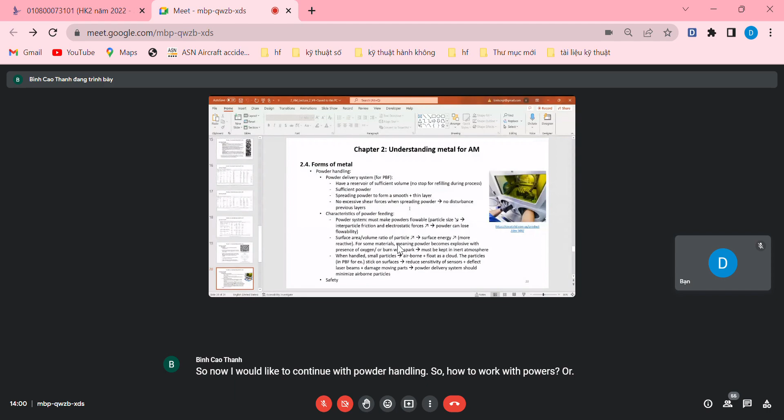So now I would like to continue with powder handling, so how to work with powders, or this may be related to the system inside the AM machines.

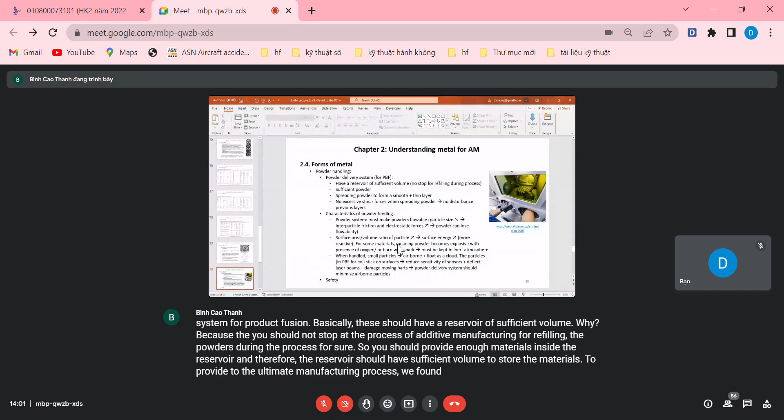Okay, the powder delivery system for powder bed fusion. Basically, this should have a reservoir of sufficient volume. Why? Because you should not stop the additive manufacturing process for refilling powders during the process. So you should provide enough materials inside the reservoir to store sufficient powders to supply the process without interruption.

The system should spread the powder to form a smooth and thin layer. Remember that for certain materials, for example stainless steel 316L, the minimum layer thickness can be 20 microns, a relatively thin layer, so you need a precise powder delivery system to spread the powders to form smooth and thin layers.

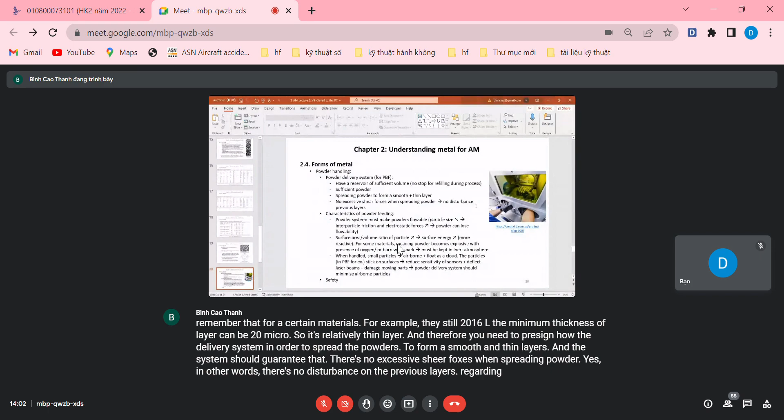And the system should guarantee there are no excessive shear forces when spreading powder. In other words, there's no disturbance on the previous layers. Regarding the powder feeding characteristics, yeah.

So the powder system must ensure the flowability of powders. This can be done by reducing the particle size. Basically, you should reduce the size of the powders.

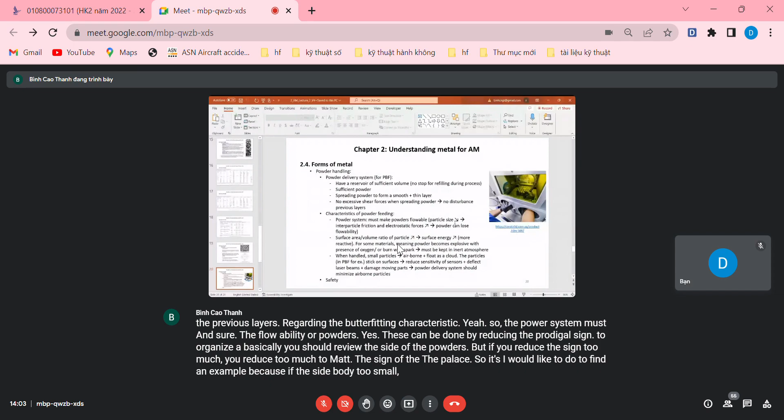But if you reduce the size too much of the powders, if the size of the powder is too small, then they tend to stick to each other, so it's easier to have agglomeration. So again, finding a trade-off or balance is also important to guarantee the flowability of the powders.

This means that if you reduce the size too much, you may have an increase in friction and electrostatic force, and in that case you lose the flowability, so this should be carefully performed.

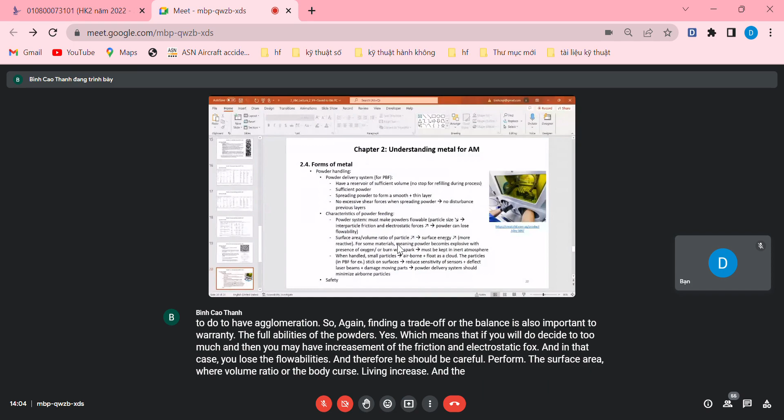The surface area per volume ratio of the particles, if it increases, the surface energy is increased and the powder becomes more reactive. This is especially important for magnesium or aluminum powders.

So if you reduce the size of the powders, the surface area within a specific volume will significantly increase, and therefore the probability that oxidation reactions occur can be increased. You should pay more attention, especially in the case of aluminum powders, because it's easy to react with oxygen or be ignited by electric discharge.

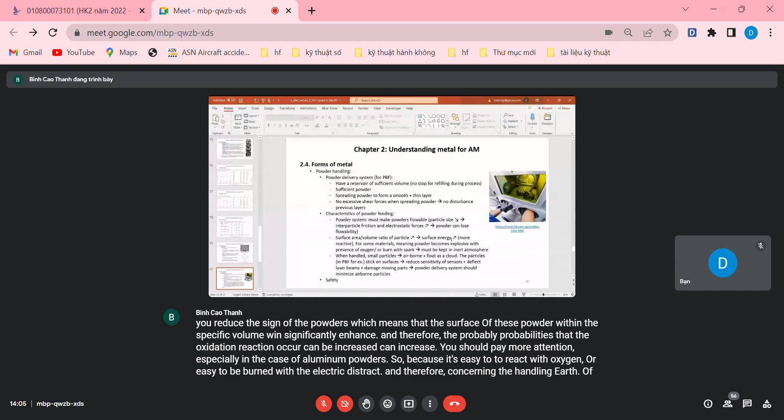Concerning the handling of aluminum powders, the powder should be kept inside an inert atmosphere to prevent oxidation reactions or reaction with moisture, which can cause exothermal reactions, and the heat will have a negative effect on those who handle powdered metals, like in the case of aluminum powders.

When handling small particles, they can float as a cloud, and the particles, when they float as a cloud, can stick on the surface, for example the surface of the sensor.

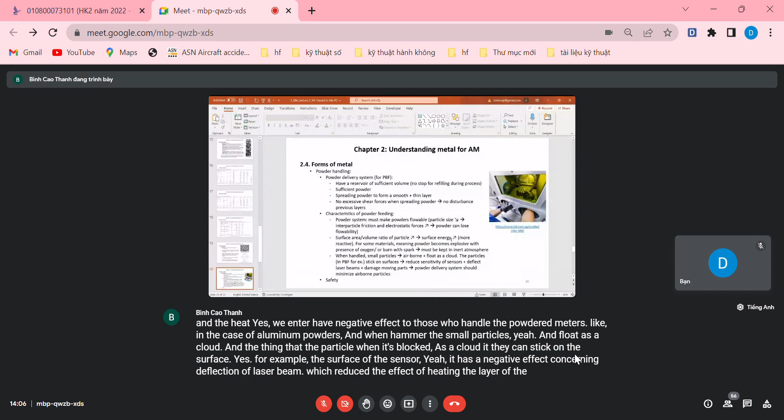This has a negative effect concerning deflection of the laser beam, which reduces the heating effect on the layer of materials, and therefore negatively influences the welding process that occurs in additive manufacturing, so you should pay attention to this.

It can also damage moving parts. This is just some information to let you know that if you reduce the size of the particles, these are the effects and considerations you need for the powder feeding system.

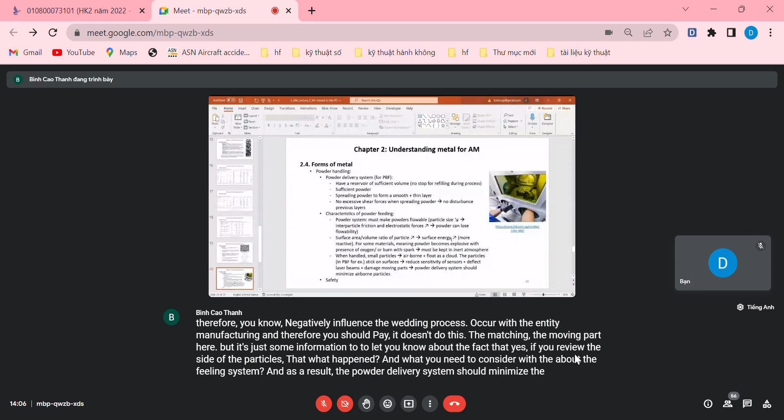As a result, the powder delivery system should minimize airborne particles, or small particles that flow as a cloud, because when this deflects the laser beam, the laser beam cannot irradiate onto the area that is supposed to provide heat to locally melt the powders.

In that case, you have a lack of fusion defect, and therefore the porosity of the part after the sintering process will be increased, which should be avoided for sure.

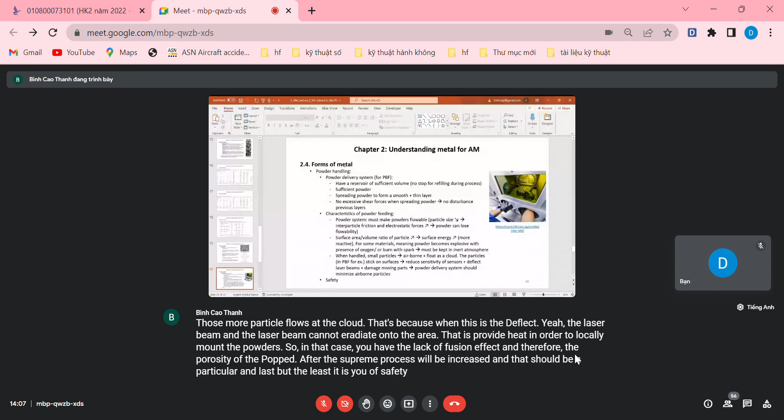And last but not least is the issue of safety when handling powders. If you breathe the powder, it can go into your lungs and stick there for a long time, which is quite detrimental to human health.

Concerning the powder production process, as mentioned in previous slides, we can use the gas atomization process or water atomization process. For the typical gas atomization process, firstly we have the input metal alloys, and then we use induction melt or furnace melt to create the molten pool.

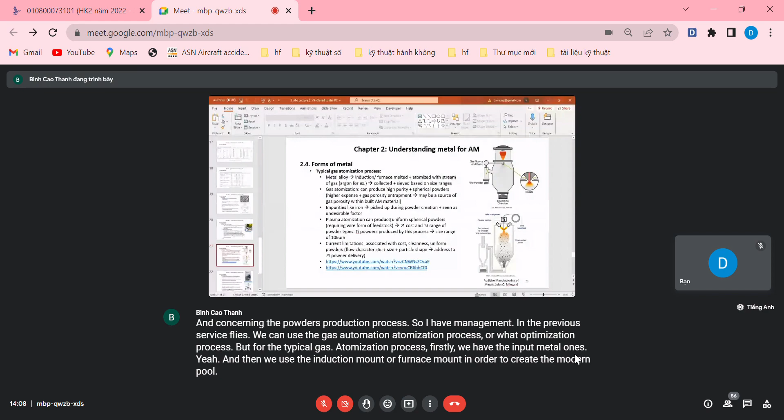So the initial material needs to be melted inside an oven, and then the atomization process with a stream of gas, like inert gas such as argon, is used to support the process of atomization.

Below, you can collect the powders, and then use the sieving process to eliminate large particles or agglomerations, distinguishing different size ranges of the powders.

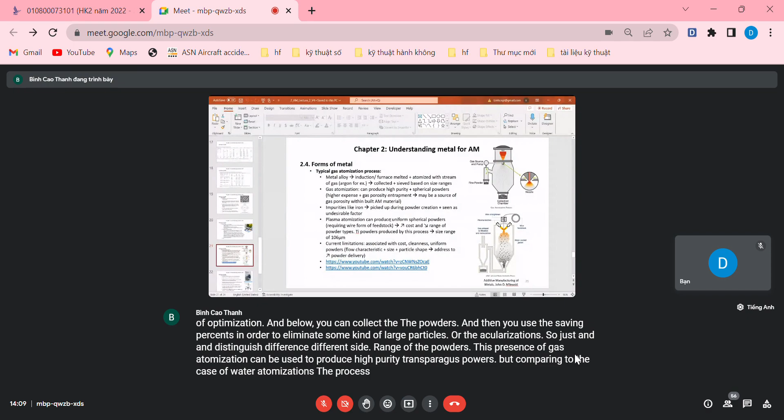This gas atomization process can be used to produce high purity and spherical powders. But compared to water atomization, the process is more expensive and may have gas porosity, because the gas can be entrapped inside the powders, causing porosity.

If the powder has porosity and you use additive manufacturing to fabricate the part, the pore remains inside the powders. When the powder is joined with another powder by a wetting process but not completely melted, the porosity remains inside the additive manufactured part, so you should pay attention to this issue.

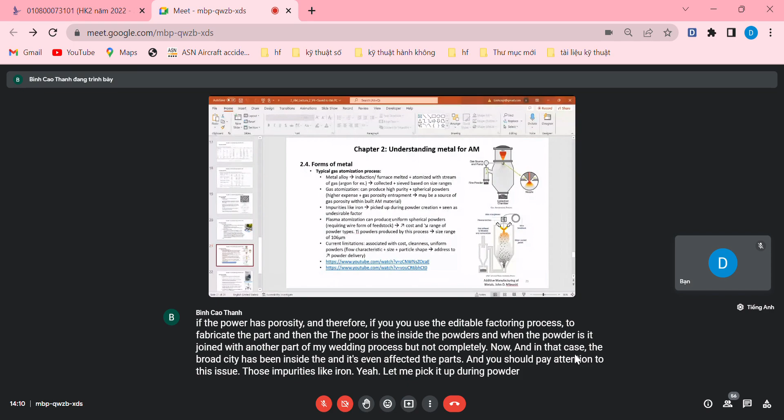Impurities like iron can be picked up during powder creation, and if we consider titanium material, iron can be considered an undesirable factor.

Plasma atomization can produce uniform and spherical powders. But since the feedstock material for plasma atomization requires the wire form of the material, you need an additional processing step, which enhances the cost.

Titanium powders are an example. This can be produced by this process, and we can achieve an output material size range of 106 microns.

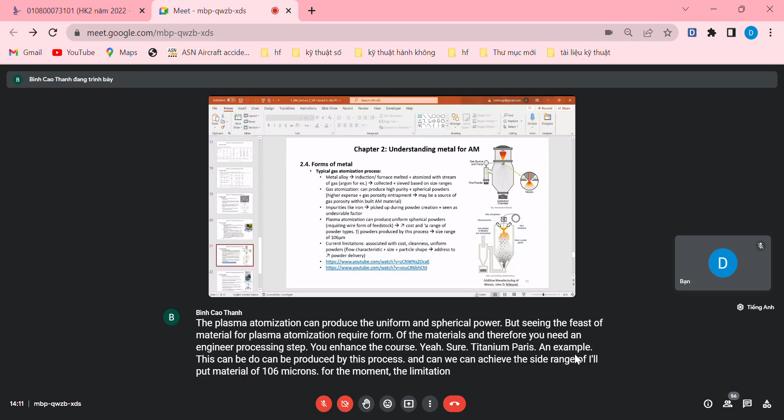For the moment, the limitations associated with the gas atomization process are cost, cleanliness, and whether or not we have uniform powders, because we may have irregular form powders. Uniform powder is quite important because it affects the flow characteristics.

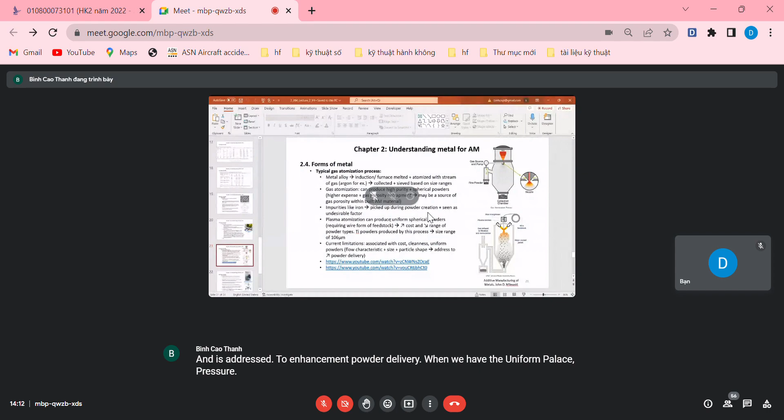The flow abilities are addressed in uniform powders. Think about the fact that if you have agglomeration inside the nozzle, it can block the nozzle, so the process cannot be continued anymore.

Wire and electrode: metal wire can be in many forms, and this is still under development for additive manufacturing.

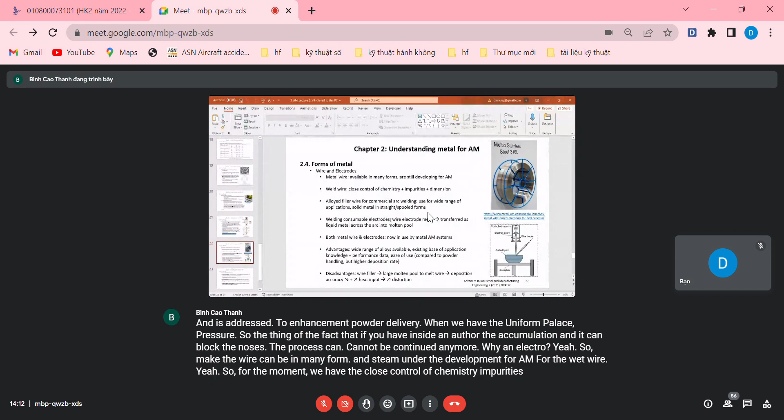For the weld wire, we currently have close control of chemistry, impurities, and dimensions, because we also developed the weld wire for the traditional welding process - not only for welding. Alloy filler wire for commercial arc welding is used for a wide range of applications, so we know pretty well about this.

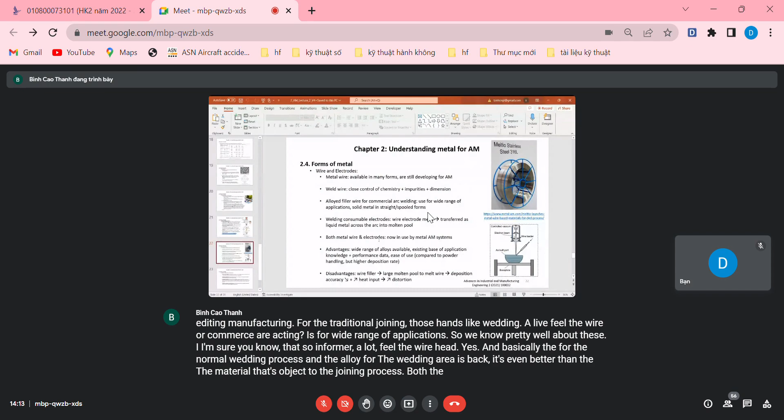I'm sure you know that basically the welding area is even better than the material that's subject to the joining process. Both the metal wire and electrodes are now in use by the metal additive manufacturing system, and everything has two side effects, so wire and electrodes have both advantages and disadvantages.

Advantages are, for example, a wide range of alloys available, which means it's cheaper to buy if they are available, existing based on the application.

Disadvantages concern probably the accuracy of the additive manufacturing process, because we have a large molten pool to melt the wire, so it affects negatively the deposition accuracy of the additive manufacturing process.

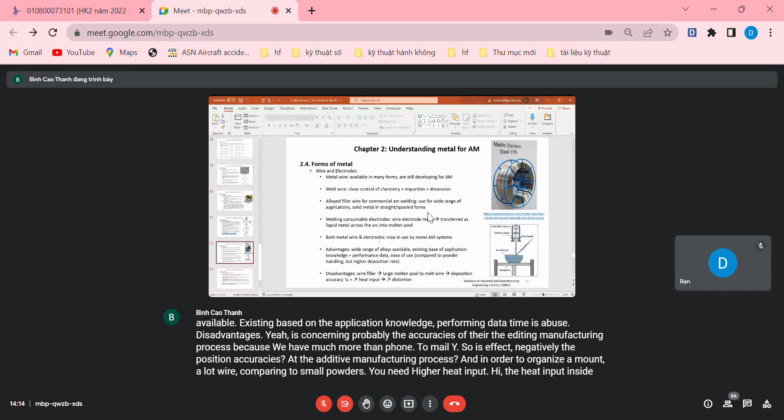In order to melt a large wire compared to small powders, you need a higher heat input. A higher heat input inside the building chamber means you may have the possibility of thermal gradients when additively fabricating the part.

In other words, you may have stress concentration, the residual stress caused by thermal factors, and if it's released, you may have distortions. Using the wire filler, you may have the possibility of part distortion after the additive manufacturing process.

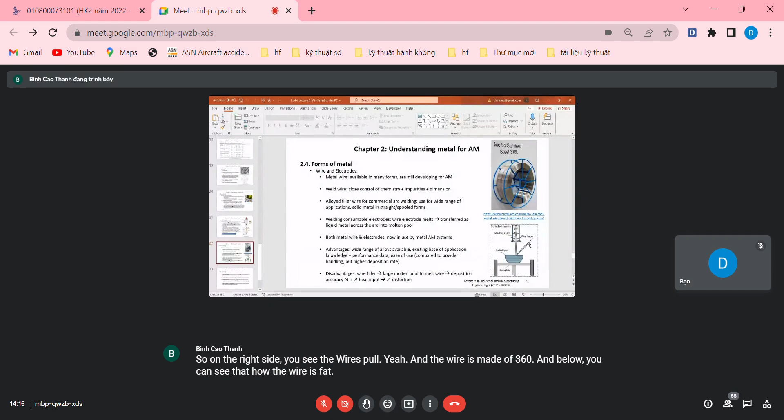On the right side, you see the wire spool, and the wire is made of 316L stainless steel. Below, you can see how the wire is fed to the additive manufacturing system using an electron beam as the heat source in order to build up the part layer by layer.

Almost the last line of chapter 2, we can talk about other types of materials. For example, composite, intermetallic, and metallic glass.

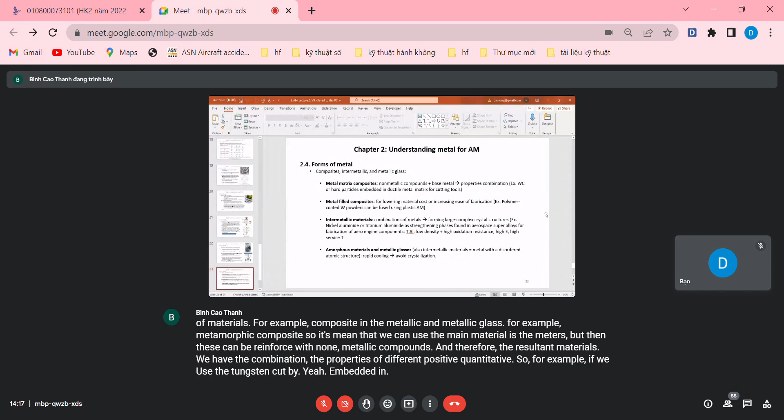For example, metal-matrix composite means the main material is metal, but it can be reinforced with non-metallic compounds, so the resulting material combines properties of different constituents. For example, tungsten carbide embedded in a ductile metal matrix for cutting tools. The cutting tool will have the properties of tungsten carbide and the properties of the metal matrix combined.

The aim of using metal filled composites is lowering material cost and improving the ease of fabrication, like in the case of polymer-coated tungsten powders.

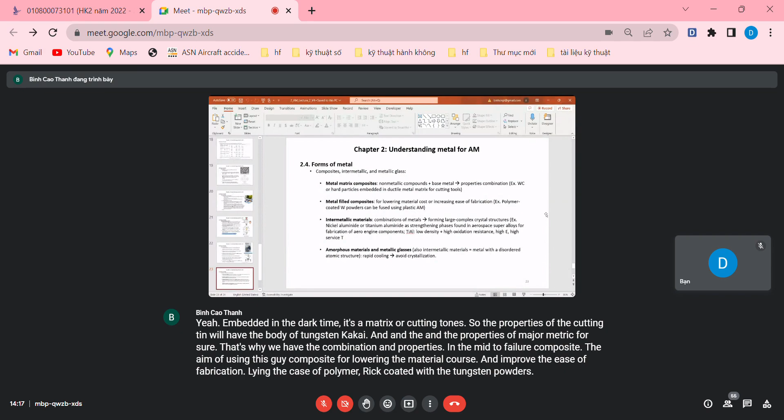Intermetallic materials are combinations of different metals forming large complex crystal structures. For example, titanium aluminide, which can be introduced in chapter 3 on aerospace materials. We will not focus so much on these materials, but it's among the type of titanium alloys, as the strengthening phase found in aerospace superalloys for fabrication of aerospace engine components.

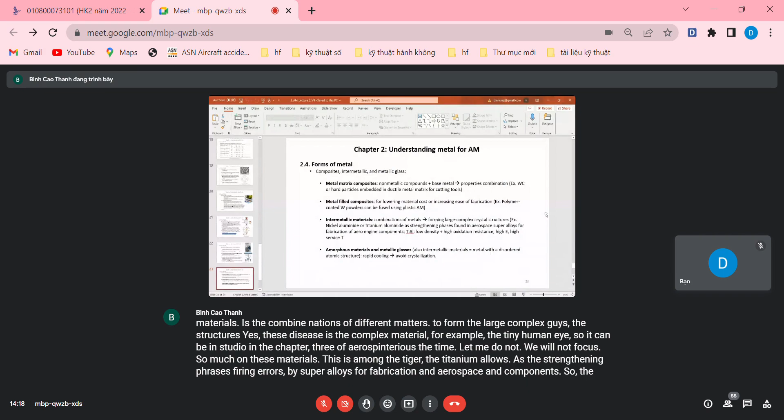The properties of titanium alloy are low density, meaning it's a light material. High oxidation resistance means its affinity with oxygen is low, so it's hard to react with oxygen. It has high strength and higher service temperatures, but compared to nickel-based superalloys, titanium alloys can withstand lower maximum temperatures.

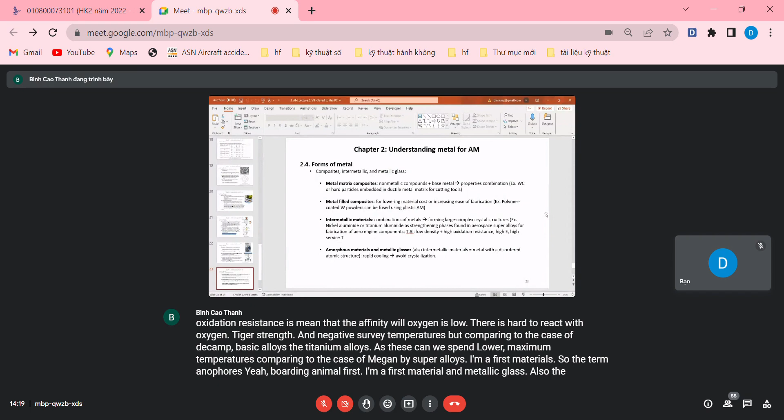Amorphous materials - the term amorphous, vô định hình, amorphous material and metallic glass. Basically you can understand this material as matter with disordered atomic structures.

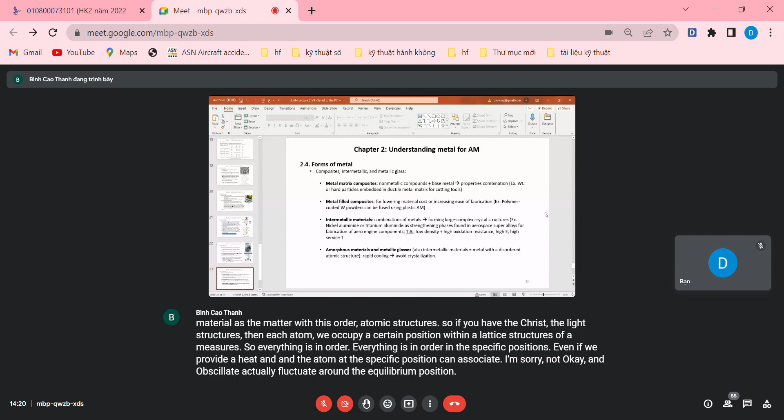If you have crystallized structures, each atom will occupy a certain position within the lattice structure of the matter, so everything is in order, in specific positions. Even if we provide heat, the atom at a specific position can oscillate or fluctuate around the equilibrium position, but it's still in a fixed position, let's say.

But for amorphous materials, atoms do not have an ordered position within the atomic structure. This can be formed by performing rapid cooling from the molten state, aiming to avoid crystallization.

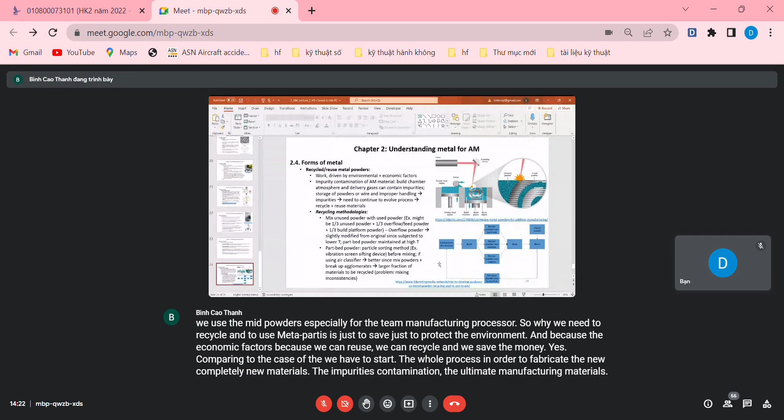The impurities and contamination of additive manufacturing materials can occur inside the build chambers. This is because we have the shielding gas acting like a shell to prevent the materials from reacting with gases like oxygen, nitrogen, and so on. However, the gas can contain impurities.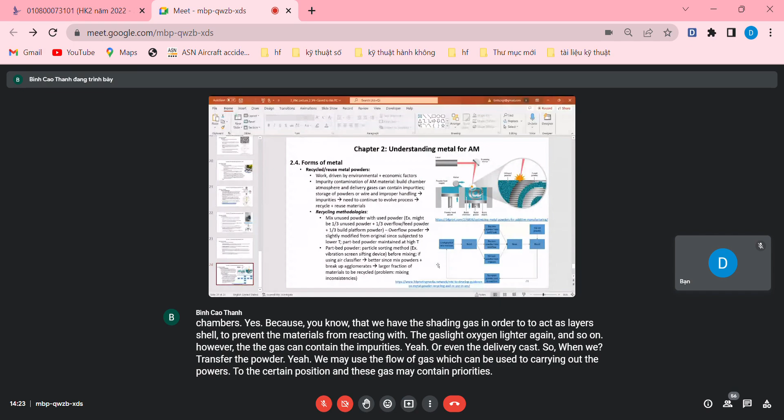Or even the delivery gas - when we transfer the powder, we may use a flow of gas to carry the powders to a certain position, and this gas may contain impurities, leading to impurity contamination of AM materials. So we need to store the powders in an appropriate way, with proper handling, in order to prevent this impurity. In other words, improper handling of the powders can create impurities, and therefore we need to evolve the process of handling.

Or if we have the impurities, or if we want to save the environment, and then we need to recycle and reuse the materials.

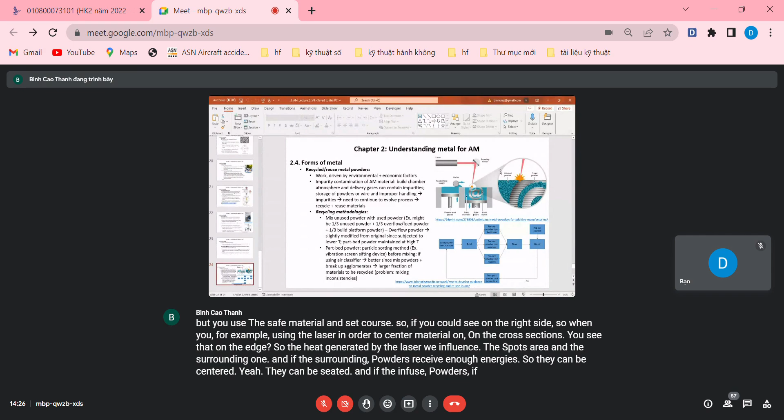So if you could see on the right side, for example using the laser in order to sinter material on the cross section, you see that on the edge, the heat generated by the laser will influence the spot area and the surrounding one. And if the surrounding powders receive enough energy, they can be sintered. If people want to use the unfused powder for the reusing process, then those sintered powders need to be eliminated by sieving techniques, for example.

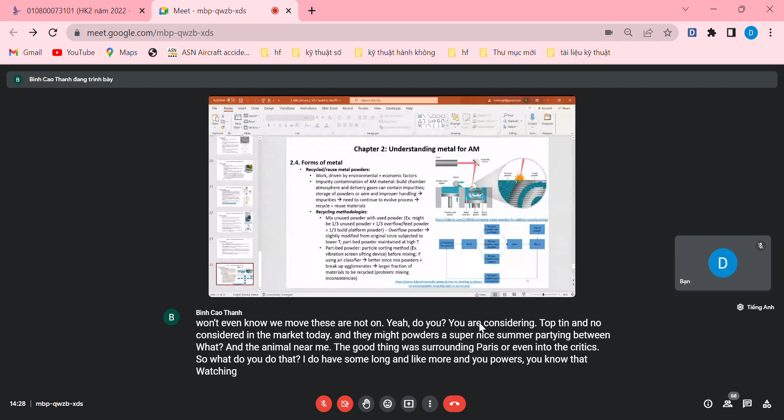As it's easier, people can mix unused powder with used powders. So one suggestion is to combine one third unused powder, one third overflow of feed powders, together with one third build platform powders.

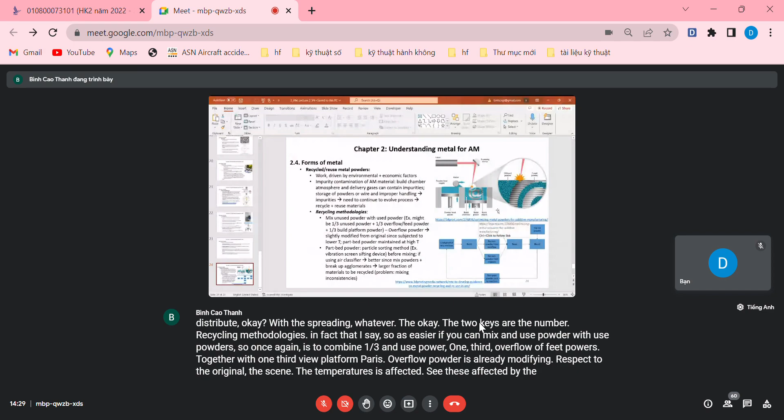Overflow powder is already modified with respect to the original, since the temperatures are affected during the sintering or melting process.

The part bed powders use the particle sorting method, just sorting by sieving before mixing, in order to eliminate some type of agglomerations or sintered powders, or to be used for the recycling process. Nothing special.

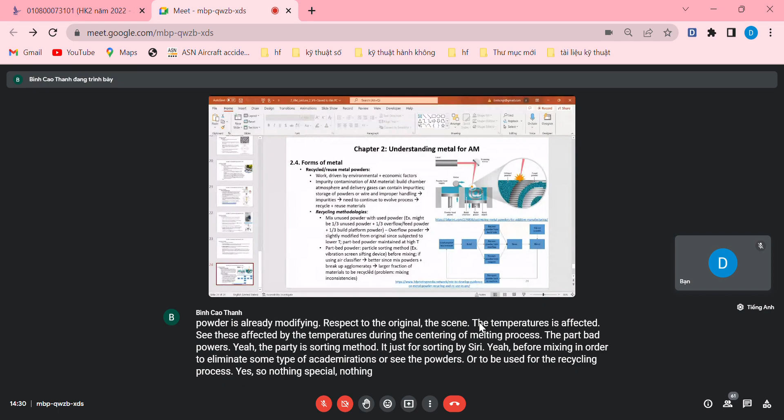So from the loading of powders to the machines, the powders can be used here, fed for the building process, and after the build...

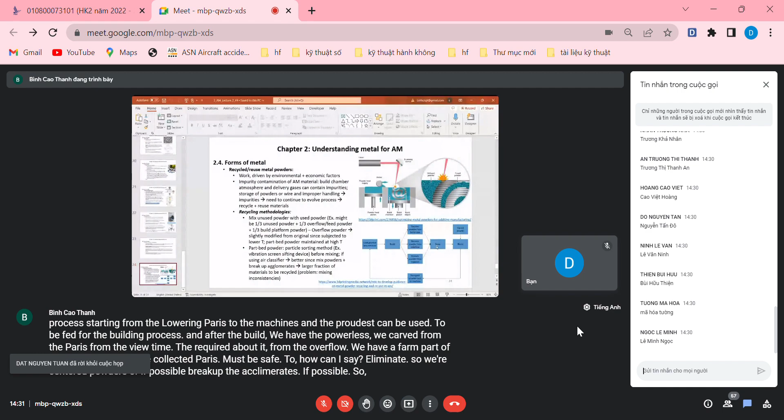We have the powders recovered from the build tank, the recovered powder from the overflow, and recovered powder from the hopper. So all the collected powders must be sifted to eliminate the sintered powders, or if possible, break up the agglomerates. So this means that after the sieving, we have the powder which is ready to be reused.

Afterward, you need to mix this powder with new powders, about one third amount of new powder, and then we transport it back to the machines and load it in, ready for the next build.

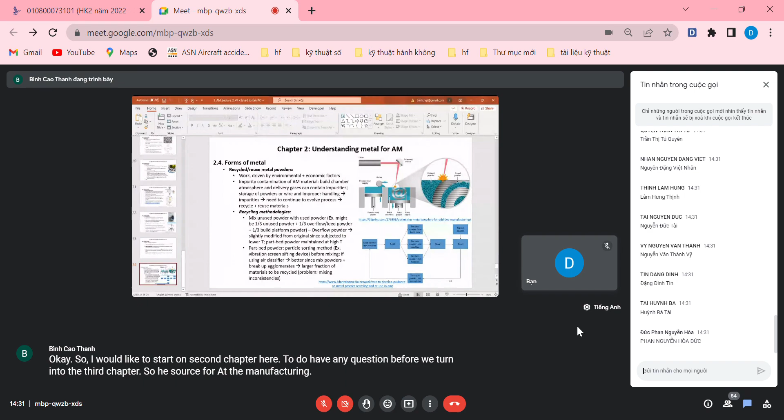Okay, so I would like to stop the second chapter here. Do you have any question before we turn to the third chapter? Heat source for additive manufacturing. I'll leave it here for a minute. I know you're spending time writing your name. Okay, then no question. Okay, so I will start with the third chapter.

No, no, no, this is the aerospace material. Okay, additive manufacturing, yeah, that third one. Okay.

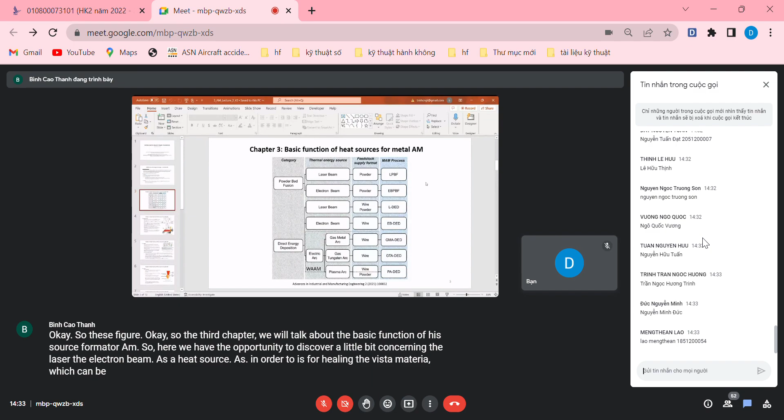So this figure, okay, the third chapter, we will talk about the basic function of heat sources for AM. So here we have the opportunity to discover a little bit concerning the laser and the electron beam as a heat source, used for heating the feedstock material, which can be either powders or wire. And of course, the heat source can also be others, like wire arc additive manufacturing, wire arcs.

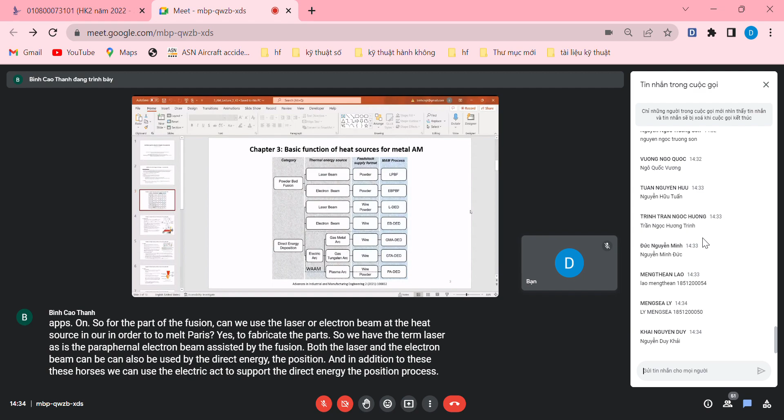So for powder bed fusion, can we use the laser or electron beam as the heat source in order to melt powders? Yes, to fabricate the parts. So we have laser powder bed fusion and electron beam assisted powder bed fusion. Both the laser and the electron beam can also be used by direct energy deposition. In addition to these heat sources, we can use electric arcs to support the direct energy deposition process. Almost all direct energy deposition processes can use wire as feedstock material, and some can employ powders as the feedstock material.

Now I would like to talk a little bit about the molten pool. So the heat source intends to heat up the material to create a molten pool. The laser, for example, is focused on a small area, providing enough heat to locally melt the material on the surface, and we have the melt pool here.

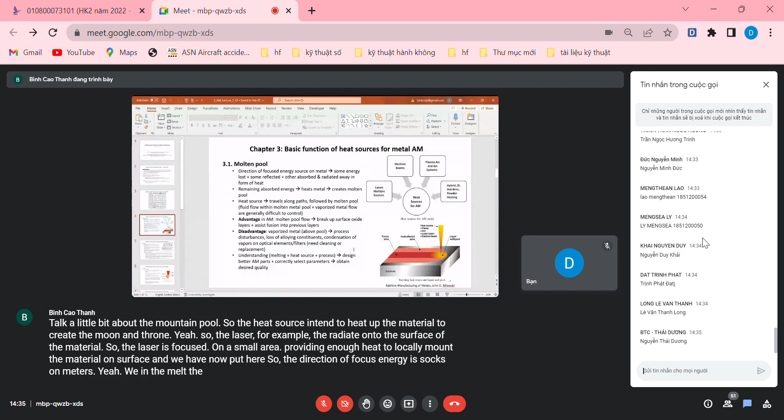So the direction of focused energy strikes on the material and will melt the material if the energy provided is enough. Because when traveling from the mirror, the source, to the surface of the part, some energy is lost.

Some energy, when reaching the surface, will be reflected, so it will not be absorbed onto the material to heat it up. Others can be absorbed, but are immediately radiated away in the form of heat. So some energy is lost, either before reaching the surface, or reflected, or afterward radiated away as heat. The remaining absorbed energy will play a role in heating the parts or the material to create the molten pool at these positions.

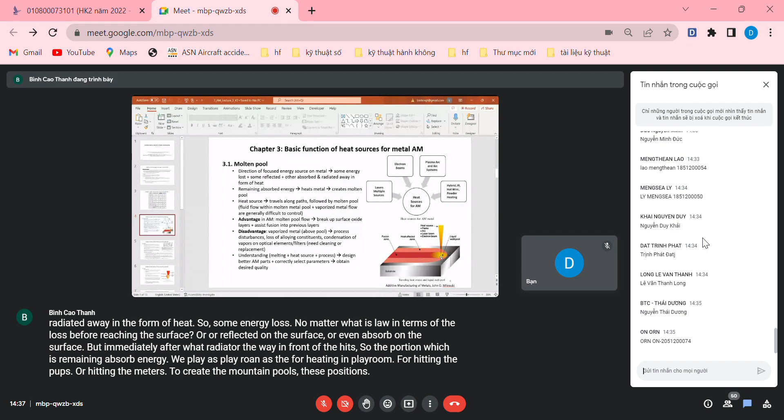You know that the heat source or the laser beam travels along the path following the scanning vector. And when it travels, it's followed by the molten pool. So when it moves to the next position, the molten pool will be created, and it's followed by the molten pool when the heat source travels along the path.

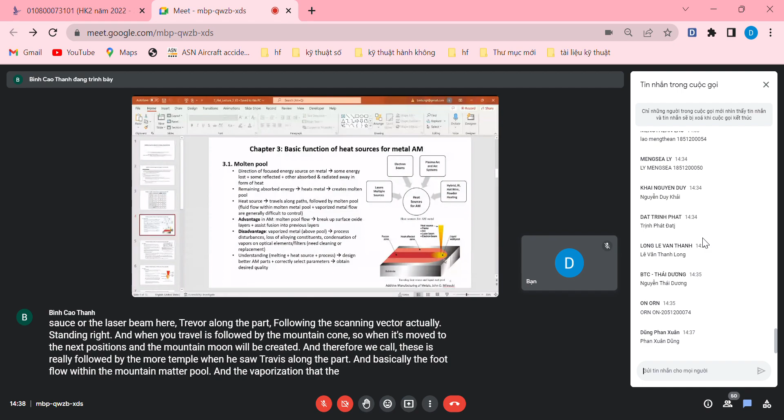Basically, the fluid flow within the molten metal pool and the vaporization of the flow are generally difficult to control because it occurs at high temperatures. And the scanning affects the control of the fluid flow within the molten metal pool and the vaporized metal flow.

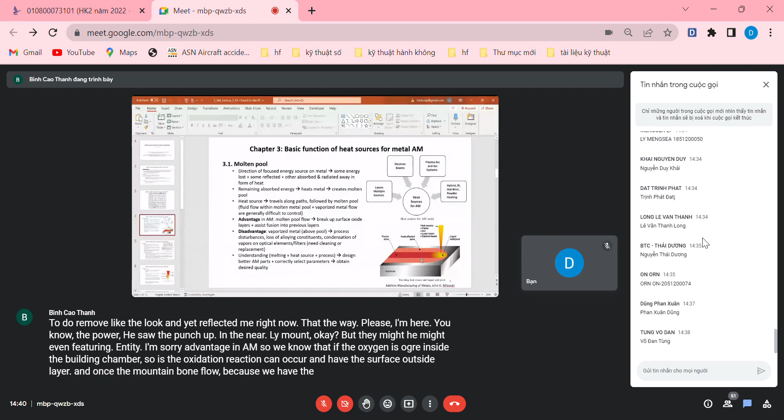Advantage in AM. We know that if oxygen occurs inside the building chamber, the oxidation reaction can occur and we have a surface oxide layer. Once the molten pool flows, because we have the traveling of the heat source along the path, the molten pool flow can break up the surface oxide layer and support the fusion and joining to the previous layers.

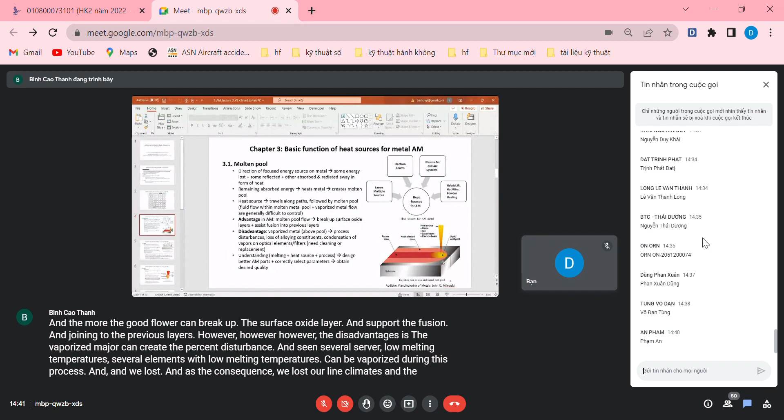However, the disadvantage is the vaporized metal can create process disturbance. Since several elements with low melting temperatures can be vaporized during this process, we lose alloying elements, and the composition of the material is changed, modified, leading to modification of properties afterwards. So it is unexpected.

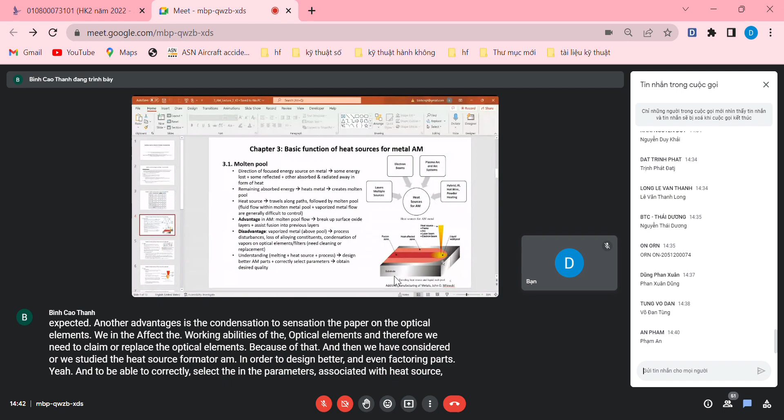Another disadvantage is condensation of vapor on the optical elements, which will affect the working abilities of the optical elements, and therefore we need to clean or replace the optical elements because of that. Then we consider or study the heat source for metal AM in order to design better additive manufacturing parts, to be associated with the heat source to create high quality parts.

Laser. We know that laser is light. This is a high energy density beam of photons. Light is photon. It's a wave, but it's also a photon.

Laser can be transmitted and focused to a small spot of energy. When the energy is focused to a small area, it can heat up the material, especially metal, to the melting temperature, and we create the molten pool.

The laser equipment: basically we have beam power, and the power can be up to thousands of watts. The focus spot is a fraction of millimeters.

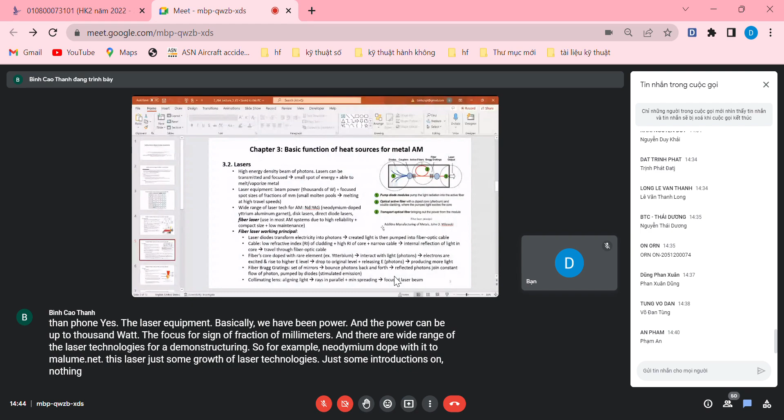There are a wide range of laser technologies for additive manufacturing, for example neodymium doped with yttrium aluminum garnet. These are just some groups of laser technologies, just an introduction, nothing more than that, because we focus on investigation of lasers.

That's enough. Direct diode laser, fiber laser, and the fiber lasers are used in most AM systems, since it has high reliability, compact size, and low maintenance cost. On the right side of the slide, showing you the graphic description of the fiber laser principle.

So basically, the laser diode transforms the electricity into photons. The photon, or light, is then pumped into the fiber optic cable. The cable has the core and the external part.

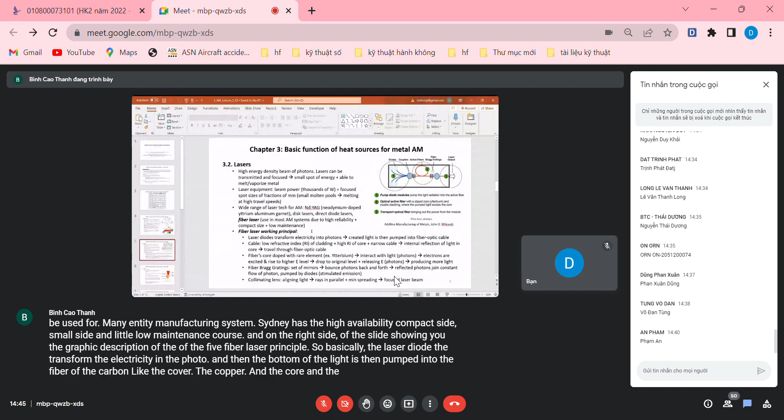The core has high refractive index. The cladding, or cover, the outside part, has low refractive index. So when the light travels through the cable, we have internal reflection of the light just inside the core, and it travels through the fiber optic cable.

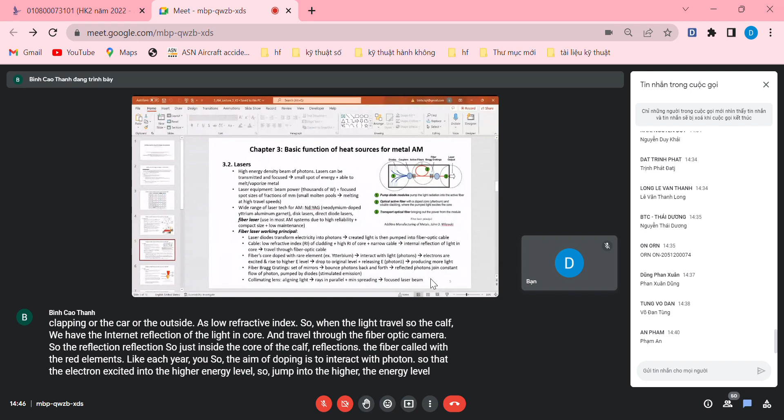The fiber core is doped with rare earth elements like ytterbium. The aim of doping is to interact with photons so that the electrons are excited into a higher energy level, like you studied in 12th grade physics. When at the high energy level and it jumps down to the lower energy level, it releases the energy in the form of photons, which produce more light. That's why we dope the core with rare earth elements, to produce more light.

This here, and then it's passed through the fiber Bragg grating. It's actually a set of mirrors that bounce photons back and forth to reflect photons, and it's pumped by diodes.

And last is the collimating lens, which aligns the light to minimize spreading and create a focused laser beam. So as output we have the focused laser beam, providing enough heat to the surface area which needs to melt, to create the melt pool. A high energy beam.

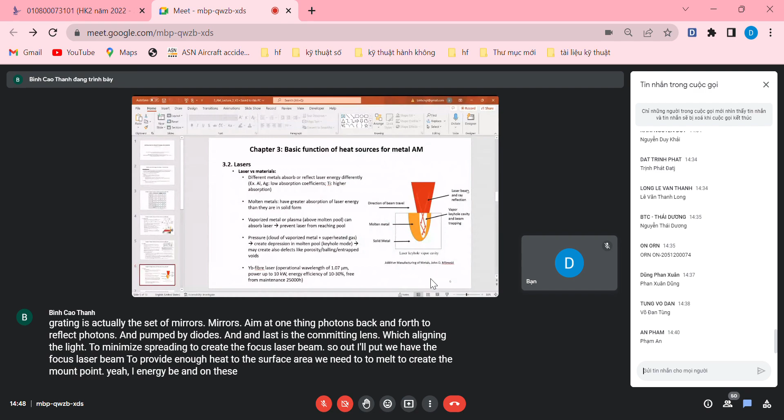On this line we consider the interaction between the laser and the materials. Different materials will behave differently. In particular, metals absorb laser energy differently. For example, aluminum or silver has a low absorption coefficient, so it's easier to be reflected. On the contrary, titanium has higher absorption of laser energy.

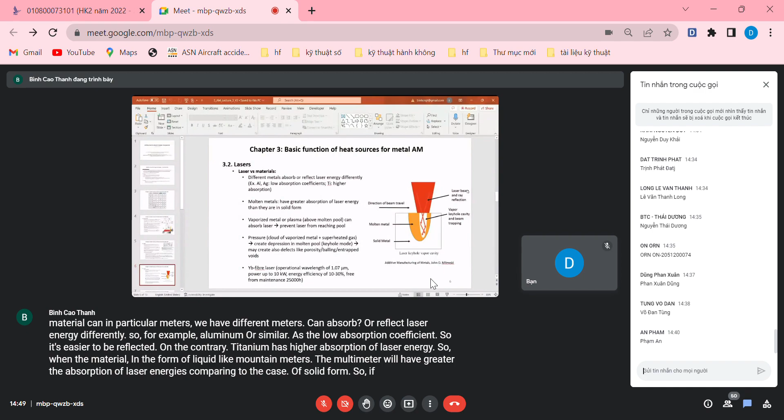When the material is in the form of liquid, like molten metal, the molten metal will have greater absorption of laser energy compared to the solid form. If the metal is vaporized, it will form some kind of cloud, or plasma, which is ionized gas. Both the vaporized matter and the plasma can absorb the laser, so we lose energy from the heat source, and this prevents the laser from reaching the melt pool.

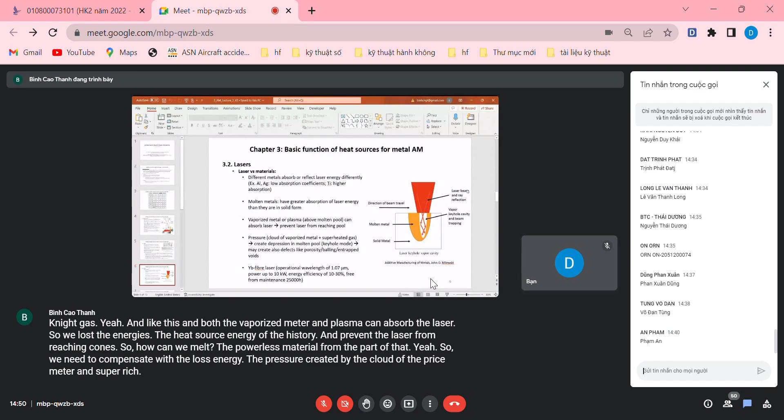So how can we melt the powder material from the powder bed? We need to compensate for the lost energy. The pressure created by the cloud of vaporized matter and superheated gas can create depression in the melt pool.

This may create a defect like porosity or entrapped voids. At high temperature, everything tends to expand. The cloud of vaporized matter is in the form of gas at high temperature, so it creates pressure, and this pressure can affect the molten pool and create some kind of porosity.

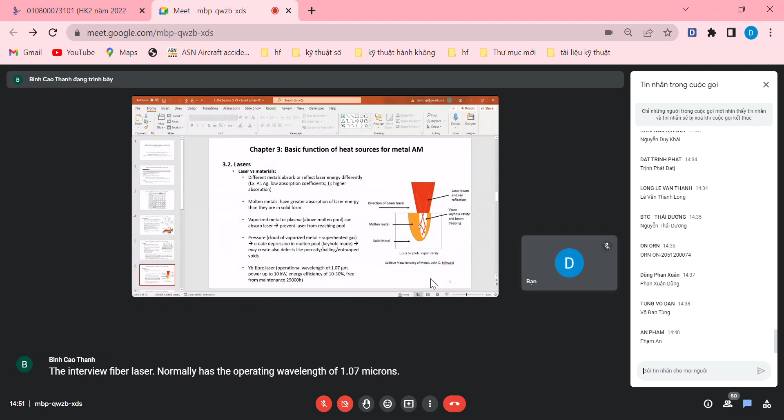The ytterbium fiber laser normally has an operating wavelength of 1.07 microns. Just some information regarding the fiber laser: power up to 10 kilowatts, energy efficient, and free from maintenance for up to 25,000 hours. That's the reason people use the fiber laser compared to other types of lasers.

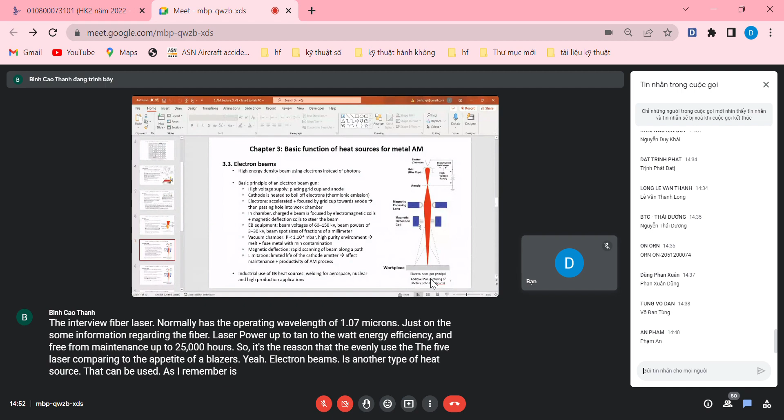Electron beams are another type of heat source that can be used. As I remember, developing this technology, for example, electron beam assisted particle fusion is used by NASA. The productivity is somehow better than in the case of particle fusion using laser as the heat source, but the accuracy of the second case, using laser, is better.

We studied this in the first chapter, when comparing the laser or electron beam, which can be used as heat source for particle fusion. Electron beam is a high energy density beam using electrons instead of photons. The figure on the right shows the basic principle of the electron beam gun, with the description on the left side.

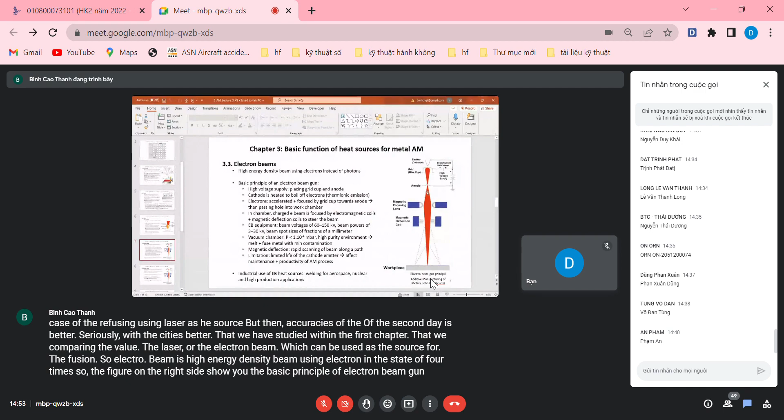We have the high voltage supply, and the cathode is heated to emit electrons. The electron is then accelerated and focused by the grid cup here, and goes toward the anode, passing through the hole inside the working chamber. Inside the chamber, the electron beam is focused by the electromagnetic coil.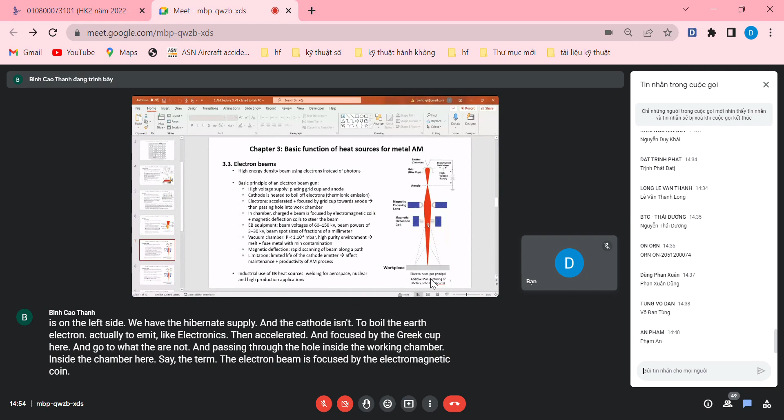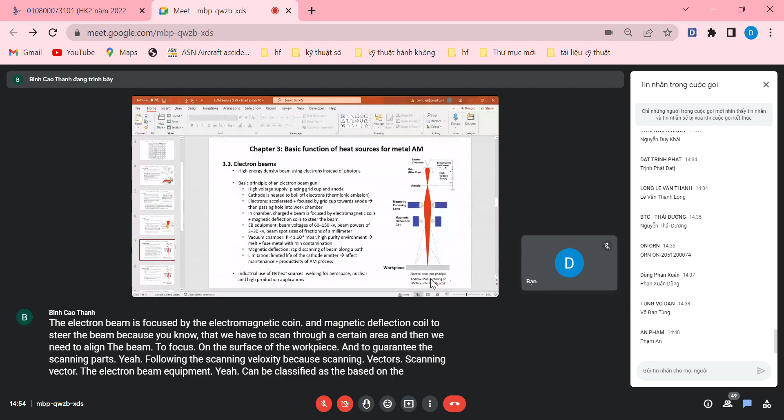And the magnetic deflection coil steers the beam, because we have to scan through a certain area, align the beam to focus on the surface of the workpiece, and guarantee the scanning path, following the scanning velocity and scanning vectors. The electron beam equipment can be classified based on the voltage. The beam voltage can be 60 up to 150 kilovolts.

The beam spot size fraction of a millimeter is how to focus the spot size here.

When you use the electron beam as a heat source inside the building chamber, you need to maintain the vacuum. The pressure should be smaller than 10 to minus 4 millibar, and you need a high purity environment to prevent deflection of the electron beam and to minimize contamination inside the chamber.

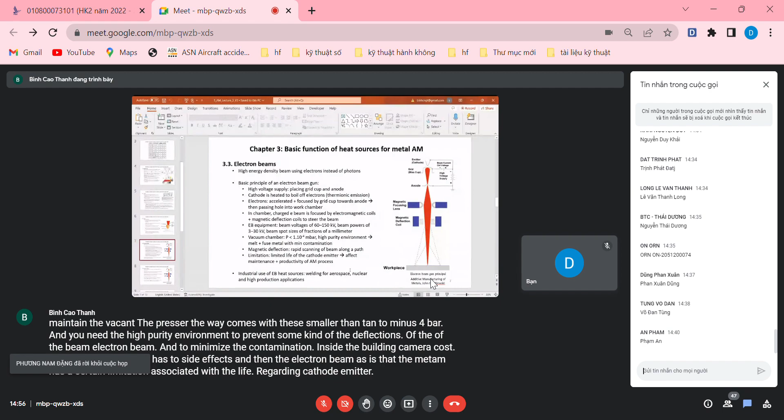Everything has side effects, and the electron beam assisted material process has certain limitations associated with the life of the cathode emitter, regarding maintenance and productivity of the AM process. When you need to maintain it, you have to wait, and to this extent productivity can be affected.

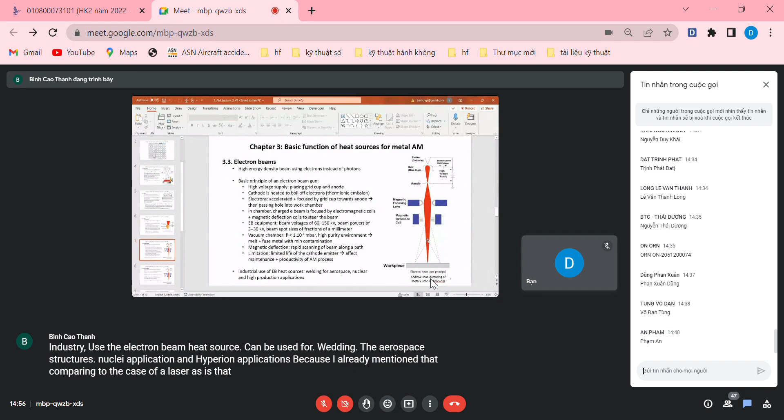Industrial use of electron beam heat sources can be used for welding aerospace structures, nuclear applications, and high production applications. Comparing to laser assisted powder fusion, the use of electron beam as a heat source tends to enhance productivity of the process, and therefore the industrial use of electron beam as a heat source can be used for high production applications.

So we have two types of generators: low voltage and high voltage gun.

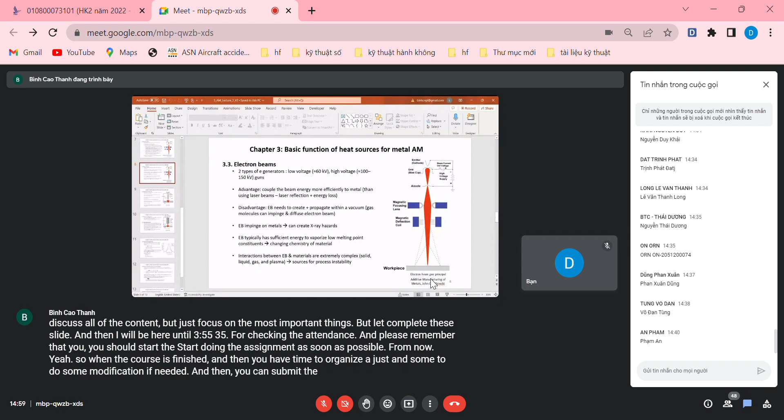Advantages of using electron beam: we can couple the beam energy more efficiently to metal.

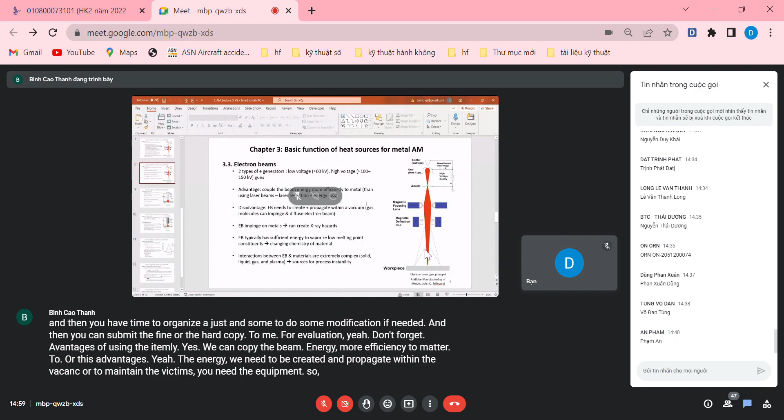Disadvantages: the electron beam needs to be created and propagate within the vacuum, so to maintain the vacuum you need equipment. High cost equipment is needed. These are disadvantages of using electron beam.

Another thing is that the electron beam can impinge on the metals, and during this process it can create X-rays, and X-rays are detrimental to human health.

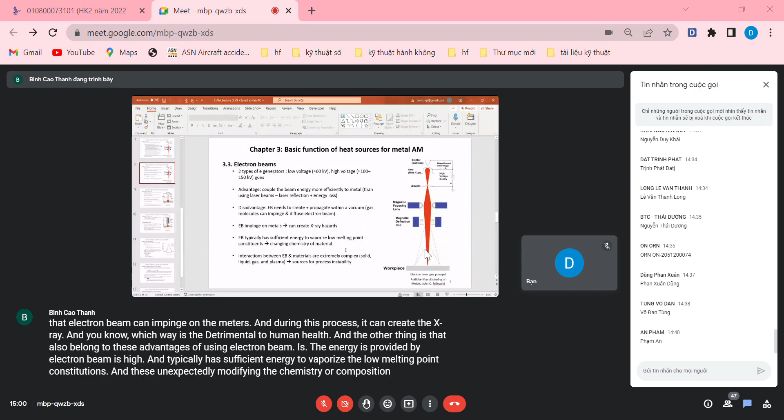The other thing, also related to the disadvantages of using electron beam, is that the energy provided by the electron beam is high and typically has sufficient energy to vaporize the low melting point constituents, unexpectedly modifying the chemistry or composition of the material and changing its properties. We do not want that.

Not only laser but also electron beam has complex interaction with the materials. Since we have this complex interaction between the electron beam and the materials, the process is easy to become unstable. Many issues need to be controlled, and if not, the process becomes unstable.